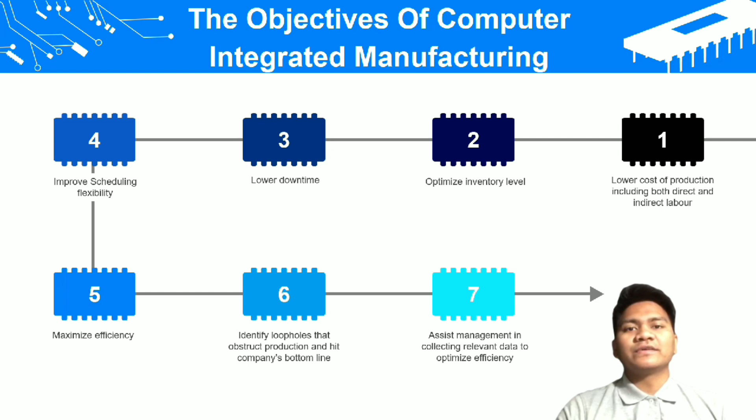Next, I will continue with the objectives of Computer Integrated Manufacturing. There are 7 objectives I found. The first is to lower the cost of production, including both direct and indirect labor. Second, to optimize inventory level, lower downtime, improve scheduling flexibility, maximize efficiency, identify loopholes that obstruct production, and hit the company's bottom line. The last one is to assist management in collecting relevant data to optimize efficiency.

Next, I will explain the characteristics of CIM. There are 4 characteristics. The first is that the span of control is narrow. The concept of span of control, also known as management ratio, refers to the number of subordinates controlled directly by a superior. A narrow span of control means there are not lots of subordinates under the managers.

Next, it has low specialization. Specialization is a method of production whereby an entity focuses on the production of a limited scope of goods to gain a greater degree of efficiency.

Last but not least, decision making is decentralized - any process where the decision making authority is distributed throughout a larger group. This also connects higher authority to lower levels of functionaries, executives, and workers. This can occur in any organization of any size, from governmental authority to a corporation.

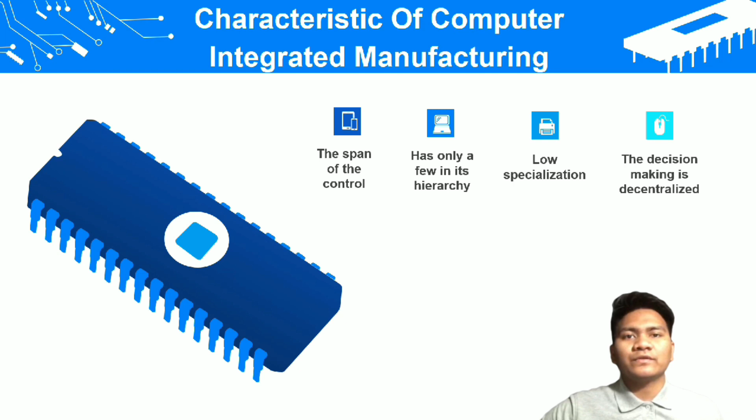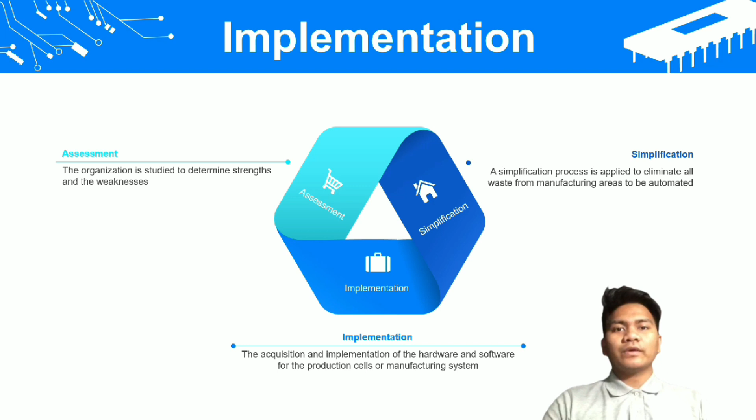Next is implementation. It starts with assessment, where the organization is studied to determine its strengths and weaknesses. Second is simplification - the process applied to eliminate all waste from the manufacturing area to be automated. The last one is implementation: the acquisition and implementation of hardware and software for the production cell or manufacturing system.

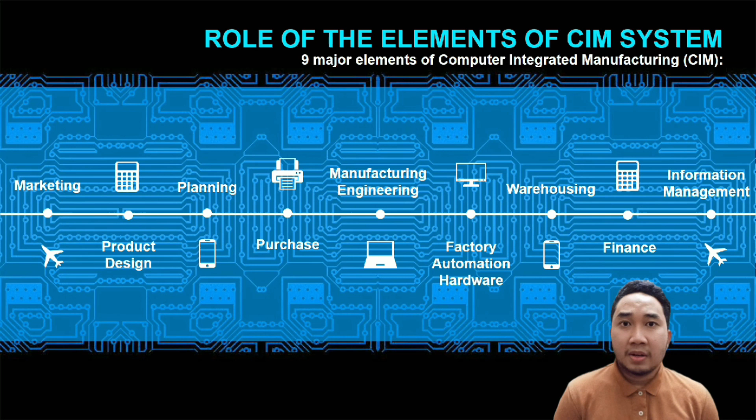Next is the role of the elements of the CIM system. There are 9 major elements of Computer Integrated Manufacturing, which are marketing, product design, planning, purchase, manufacturing engineering, factory automation hardware, warehousing, finance, and information management.

Next, we go to examples of Computer Integrated Manufacturing. The first is Computer Aided Design and Manufacturing, CAD and CAM. CAD, Computer Aided Design, involves creating a computer model defined by geometrical parameters. This model typically appears on a computer monitor as a three-dimensional representation of a part or a system of parts, which can be readily altered by changing relevant parameters. Computer Aided Manufacturing (CAM) uses geometrical design data to control automated machinery. CAM systems are associated with Computer Numerical Control (CNC) or Direct Numerical Control (DNC) systems.

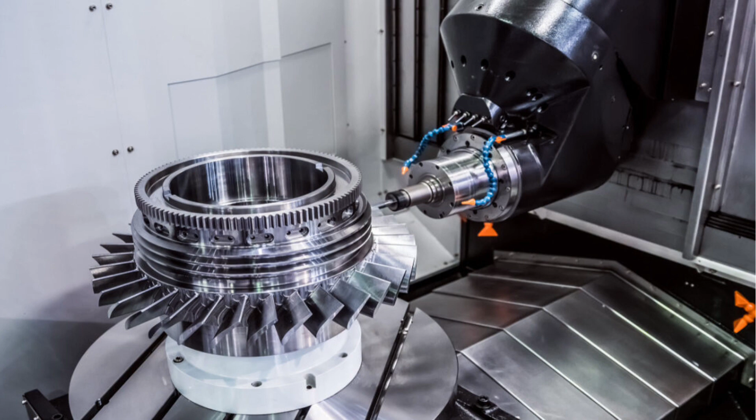The second one is Computer Numerical Control. CNC is a method for automating control of machine tools through the use of software embedded in a microcomputer attached to the tools. It is commonly used in manufacturing for machining metal and plastic parts.

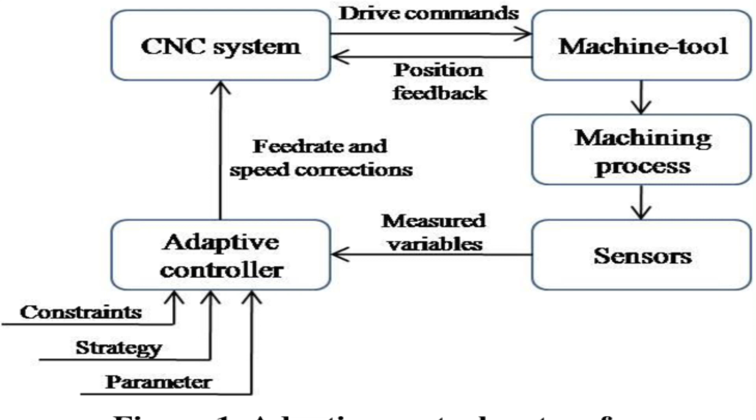The third, adaptive control, is a control method used by a controller which must adapt to the controlled system with parameters that vary or are initially uncertain. Next, industrial robots for assembly - this technology is commonly used in manufacturing cars. Other than that, automatic control is an application of control theory for regulation of a process without direct human intervention.

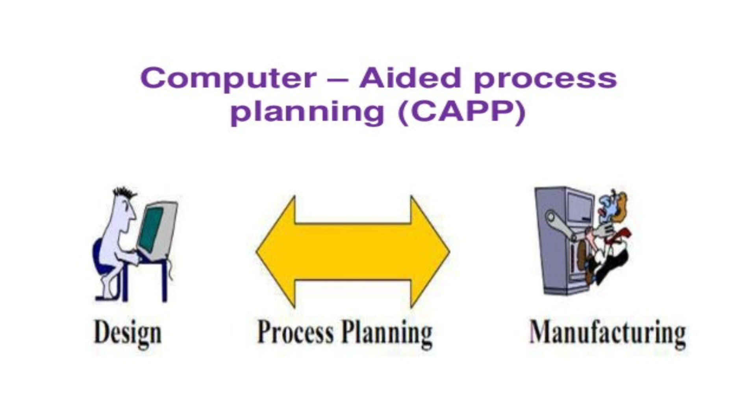Another one is computer-aided process planning (CAPP), the use of computer technology to aid in the process planning of the part or product in manufacturing. CAPP is the link between CAD and CAM in that it provides the planning for the process to be used in producing a designed part.

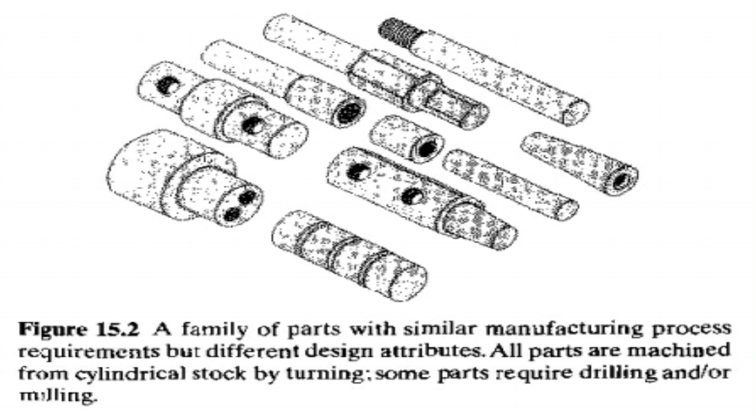Last but not least, group technology is where parts having similarity in geometry, manufacturing process and function are manufactured in one location using a small number of machines or processes. Group technology is based on the general principle that many problems are similar, and by grouping similar problems, a single solution can be found to solve a set of problems, thus saving time and effort.

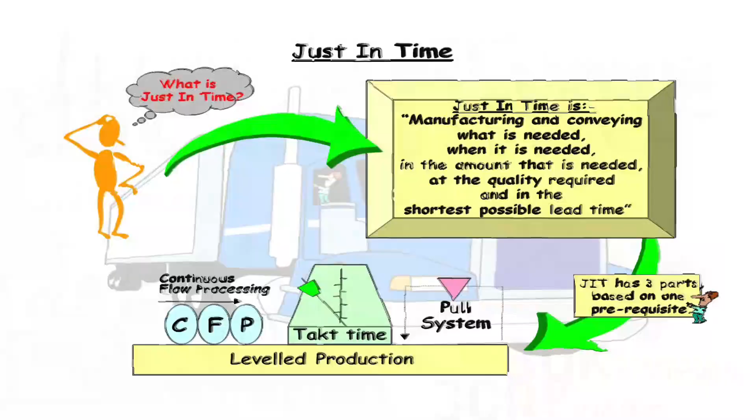Lastly, the just-in-time (JIT) inventory system is a management strategy that aligns raw material orders from a supplier directly with the production schedule. Companies employ this inventory strategy to increase efficiency and decrease waste by receiving goods only as they need them for the production process, reducing inventory cost. This method requires the producer to forecast demand accurately.

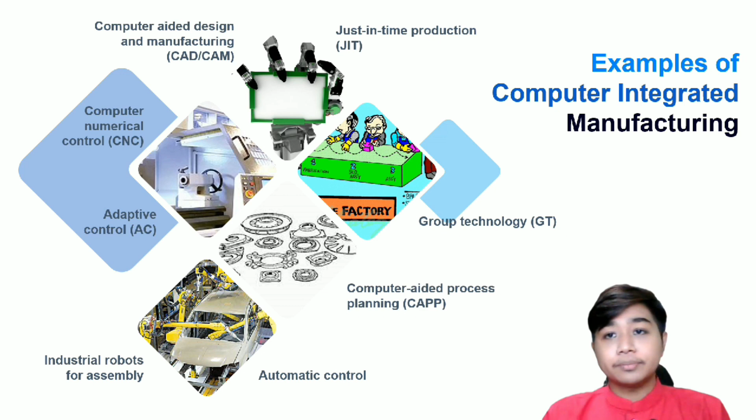After discussing examples of CIM, now we go to the advantages and disadvantages of scale of production. When we use one-off or small scale production, there are disadvantages: the costs are too high to be used, so this is not suitable, and it's also not suitable for non-complex products.

Next, when we use batch, volume or mass production, there are many advantages. It is nicely suited for batch production due to the high flexibility and automation of the CIM system, and suited for volume and mass due to the fully automated nature of CIM. Other benefits include constant monitoring, greater machine utilization, fewer errors and waste, improved productivity and quality control, greater consistency, cheaper products, parts easily manufactured and changed, random introduction of parts, less lead time, less labor, and high quality finish.

When we see more advantages, there are also disadvantages. So what are the disadvantages? The disadvantages are high initial investment and personnel training costs, job loss, and lack of individuality.

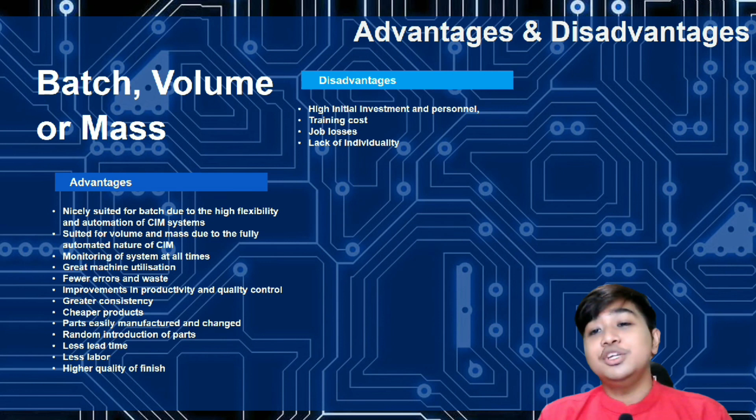The last one for scale of operation is mass customization. The advantages are more choice, the ability to design to one's own requirements, cheaper product, easy manufacturing and change, random introduction of parts, less lead time, and higher quality finish.

It also has disadvantages: high initial investment and personnel training costs, and job loss.

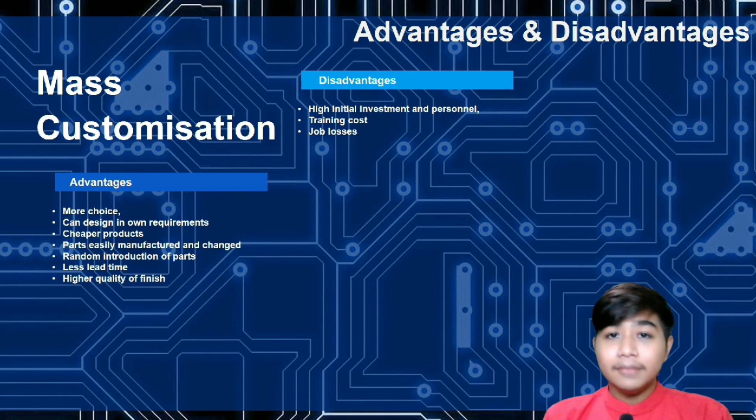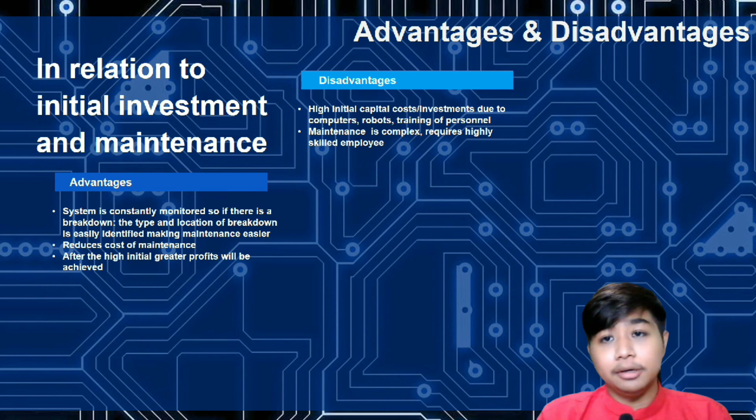I will continue with the evolution of CIM. Computer Integrated Manufacturing (CIM) is considered a natural evolution of the technology of computer-aided design (CAD) and computer-aided manufacturing (CAM), which itself evolved by the integration of CAD and CAM. Massachusetts Institute of Technology (MIT) in the USA is credited with pioneering the development of both CAD and CAM.

If we review the manufacturing scenario during the 80s, we find that manufacturing was characterized by a few islands of automation. In the case of design, the task is well automated. In the case of manufacturing, computer numerical control (CNC) machines, distributed numerical control (DNC) systems, flexible manufacturing cells (FMC), and flexible manufacturing systems (FMS) provide tightly controlled automation systems.

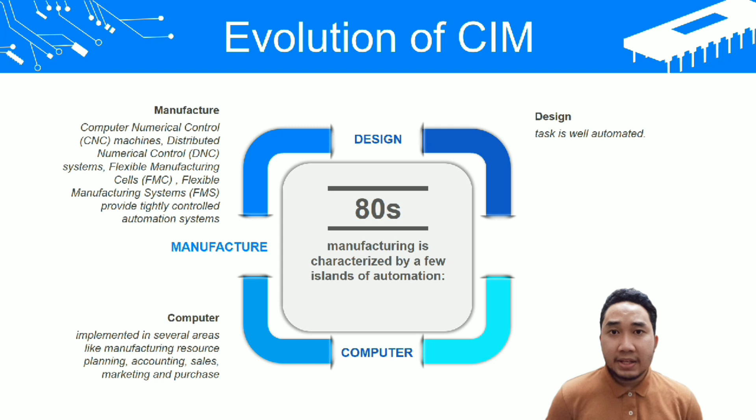Similarly, computer control has been implemented in several areas like manufacturing resource planning, accounting, sales, marketing, and purchasing. Yet the full potential of computerization could not be obtained unless all the segments of manufacturing are integrated, permitting the transfer of data across various functional modules. This realization led to the concept of computer integrated manufacturing. Thus, the implementation of CIM required the development of a whole load of computer technologies related to hardware and software.

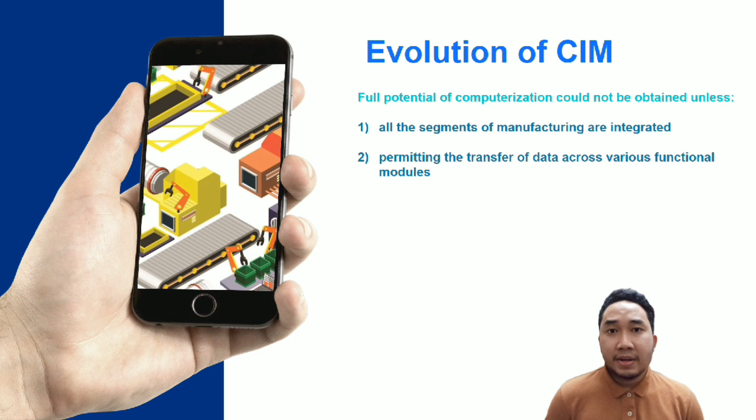In conclusion, Computer Integrated Manufacturing (CIM) is the manufacturing approach of using computers to control the entire production process. Companies nowadays depend on CIM in almost every department: engineering, mechanical, or electronic design. It has helped companies boost efficiency and productivity, reduce errors, lower production costs, and ensure timely deliveries.

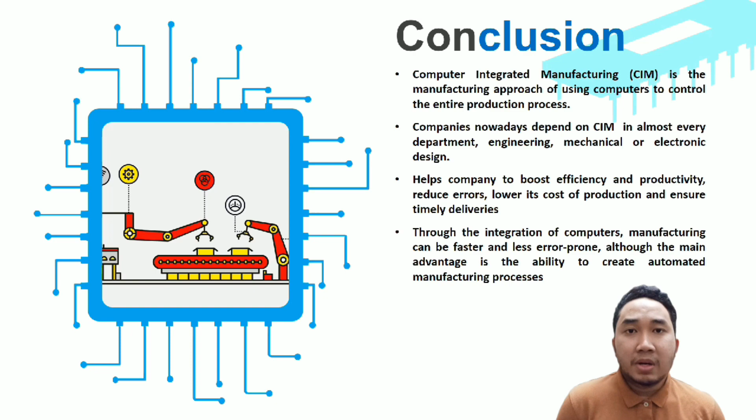Through the integration of computers, manufacturing can be faster and less error-prone, although the main advantage is the ability to create automated manufacturing processes. That's all from us. Thank you for listening.